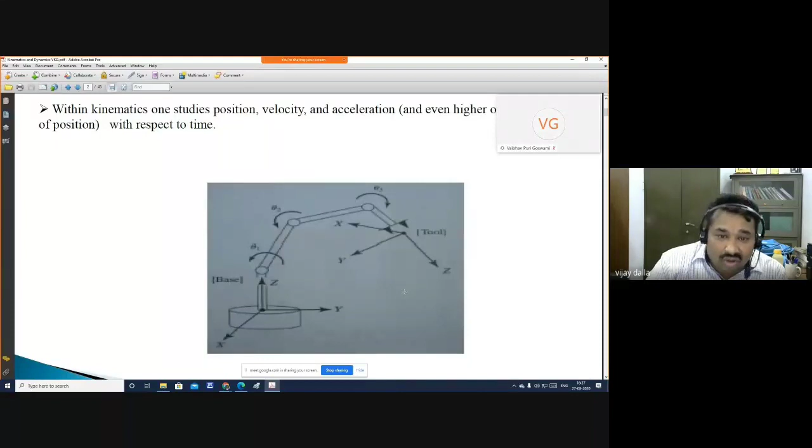So regarding these robot manipulators, the parts of the manipulators, which is also known as the robot anatomy, at each joint we need to put sensors which will tell information of torque, input torque. So just a little bit about the kinematics, then I will go to the dynamics part.

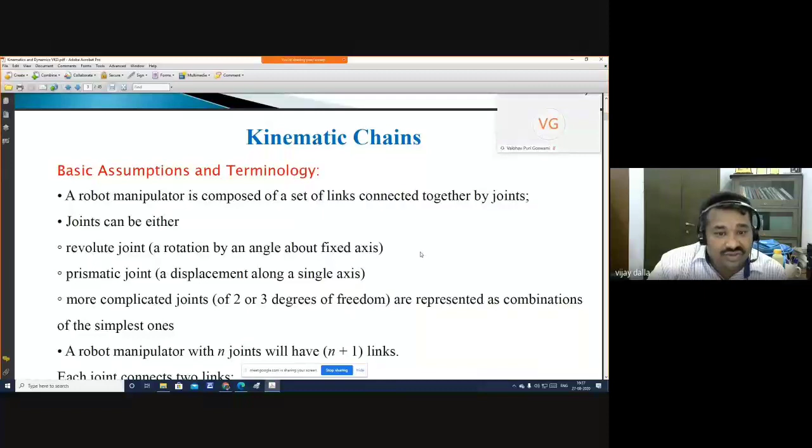So kinematic chains, generally the serial manipulators are used for any kind of operations. Out of the various types of manipulators like parallel manipulators, or you can say humanoid or others, generally serial manipulators are being used. I'm not going to detail more in the kinematics part.

You might be knowing the difference between forward kinematics and inverse kinematics. In forward kinematics, the joint variables will be given as input, and we need to find out the end effector positions. But in the case of inverse kinematics, a set of joint variables like theta 1, theta 2, and so on are what we have to find out, but the Cartesian coordinates x, y, z will be given as input, and we need to find out the joint variables.

In that we will get multiple solutions. Like this is my target point object and I have to reach it, I have to touch it. Suppose I have to deal with this object, so there are a number of ways to reach this point, like this way, or like this way. So this is the beauty of inverse kinematics.

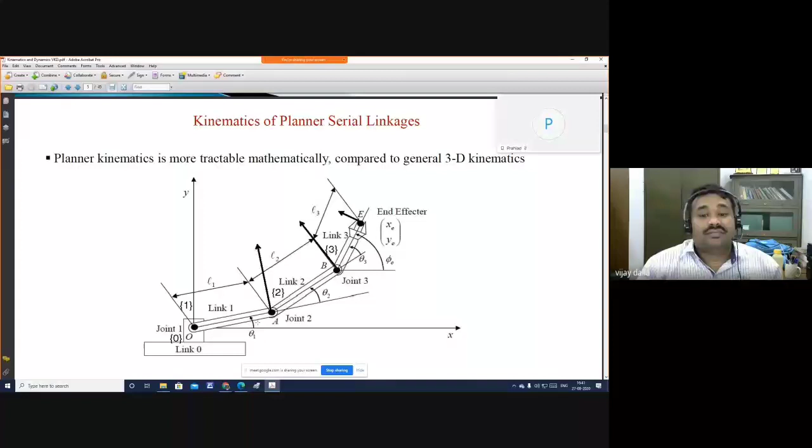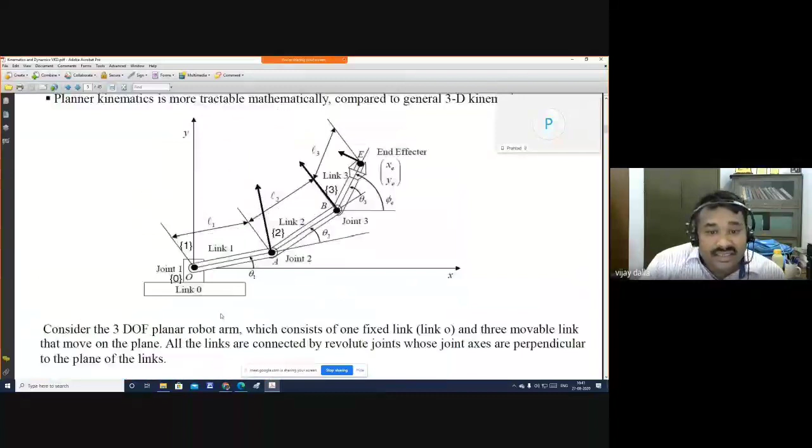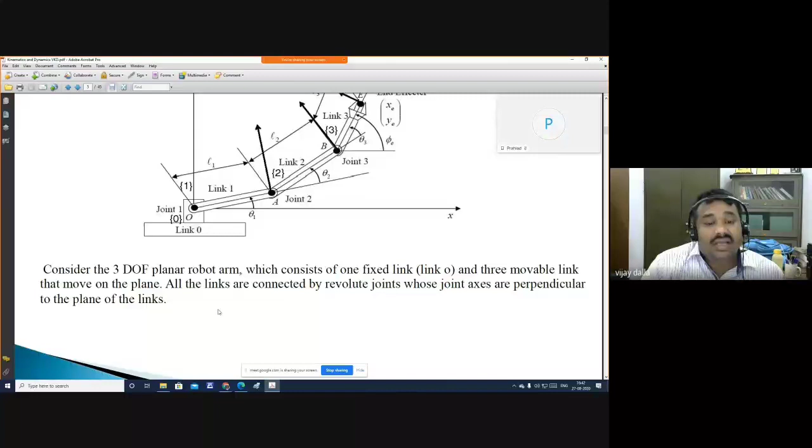And link 0, the base, is the link 0. Regarding degrees of freedom, you might be knowing, but again I'm detailing because the purpose of this course - I have conducted 3 Atal FDPs on robotics and artificial intelligence, 2 on robotics, 1 on artificial intelligence. So the purpose is just creating an environment for learning the basics of thrust areas like robotics, artificial intelligence, 3D printing. So just creating awareness, then a little bit we can discuss research parts, but basics we should know.

Like if you see this equation, YE, the position for Y direction, the end effector position in Y direction. So based on this, please let me know, it's a robot of how many degrees of freedom. You can put your answer in the chat box. Please see this equation and let me know how many degrees of freedom are there, and the condition is all the joints are active.

Passive means the joints are not motorized, not controlled. But active means the joints are controlled. So all the joints are controlled. You can see theta 1, theta 2, theta 3 - there are 3 joints, active joints. So it means 3 degrees of freedom. In robotics, each active joint is considered 1 degree of freedom.

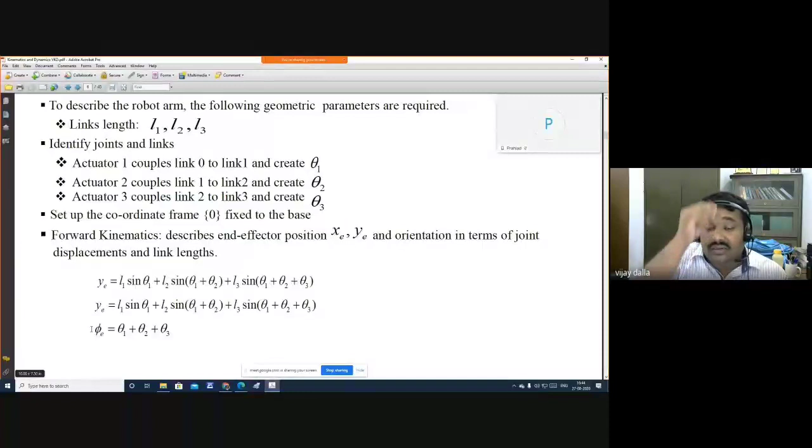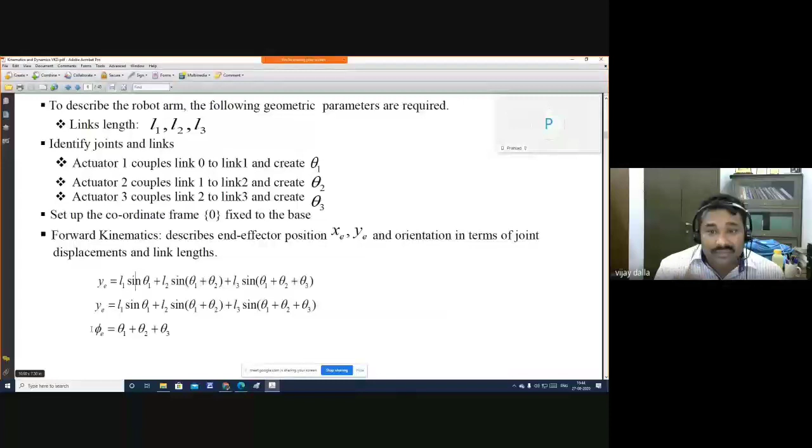Phi E is the configuration, or you can say the orientation of the whole manipulator. What is the difference between manipulator and a robot? Sometimes we say robot, sometimes we say manipulator. A manipulator is a robotic arm, so both are interchangeable words. Sometimes we say manipulator or robot.

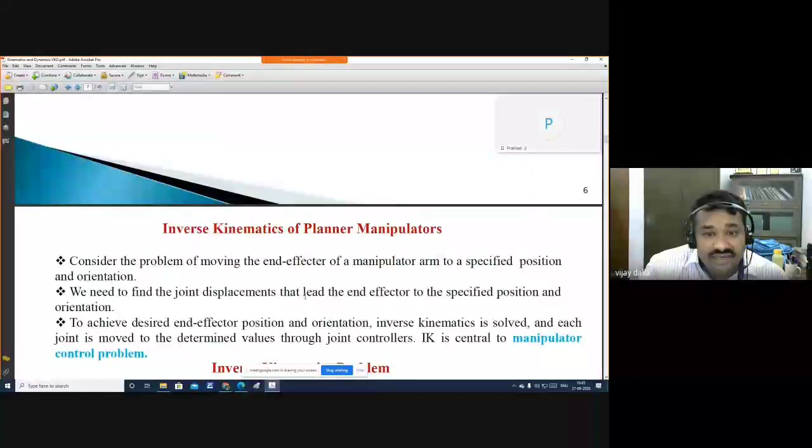I have used one term, configuration. Configuration means position plus orientation, and it is also known as the pose of the manipulator. Pose of the manipulator means position plus orientation. Quickly I am moving because my main purpose is to discuss about robot dynamics.

So elbow up configuration, you can see this one, elbow up, like elbow up, and this is the elbow down configuration.

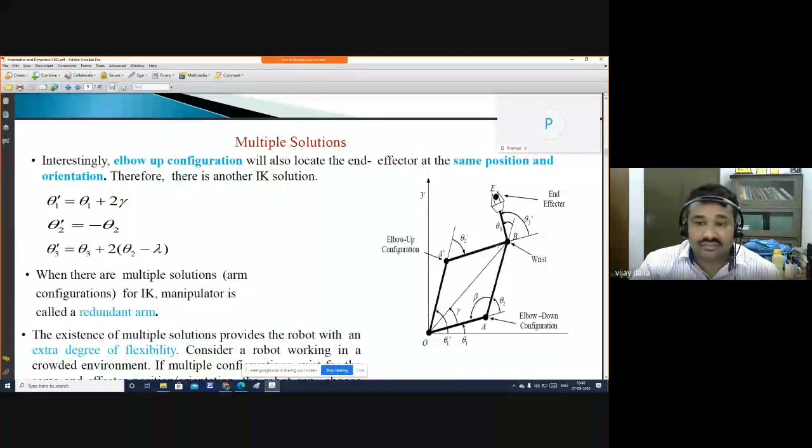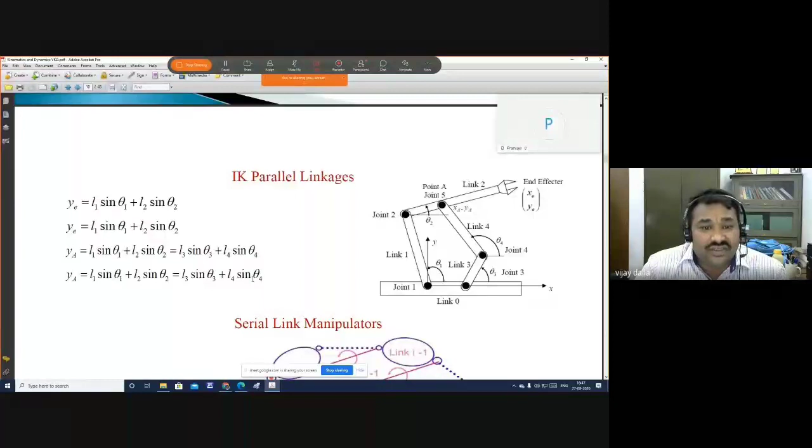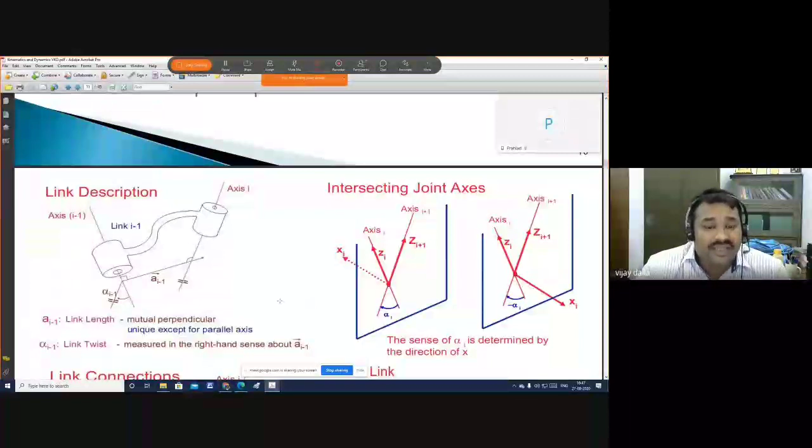You might be knowing DH parameters and why it is required. Geometrically also we can get the robot tip positions this way, but why is DH convention required? This is the question. So the answer is, for the simplest case, for a simple robot, we can use the geometric approach. But suppose a robot has a number of degrees of freedom like 10, 20, and it's in 3D. So we need to opt for the DH convention.

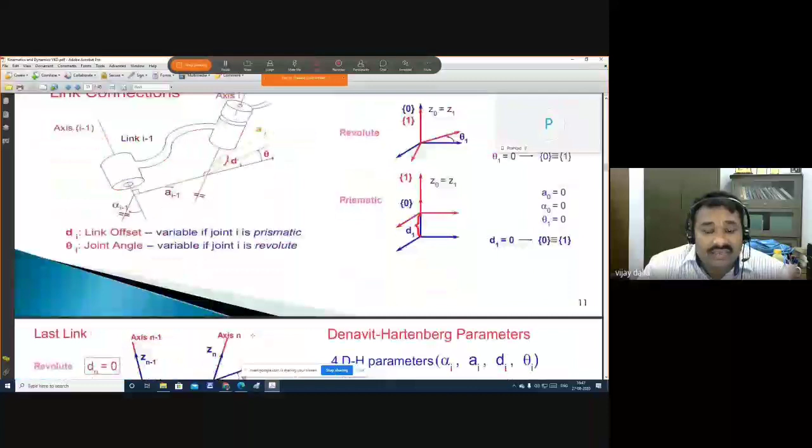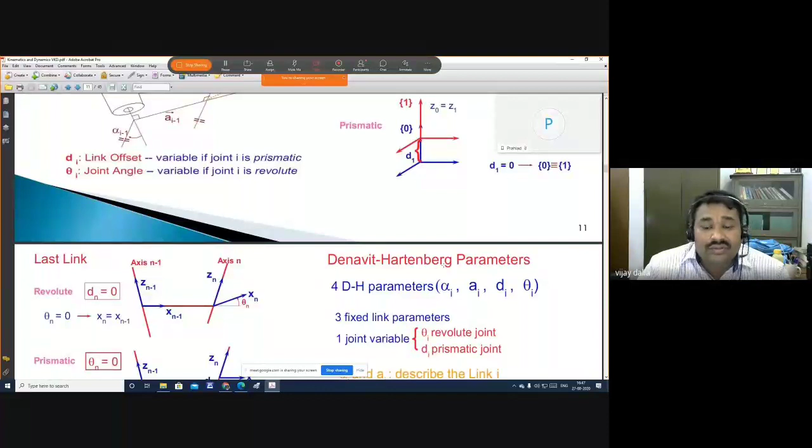What is the full form of DH? The full form of DH is Denavit-Hartenberg parameters, named after two scientists. The main things are there are 4 parameters: alpha, A, D, theta. Alpha is the twist angle, A is the length, D is the joint offset in the case of prismatic, and theta is the joint angle in the case of rotary.

And alpha - if suppose earlier both axes are like this, parallel, as you can say both are coinciding to each other. But what is happening? It becomes like that. So if you want to get the angle, the angle of difference will be here, alpha. If there is no angle, then it will become the previous position, meaning parallel in position - both axes will be in parallel. A means link length.

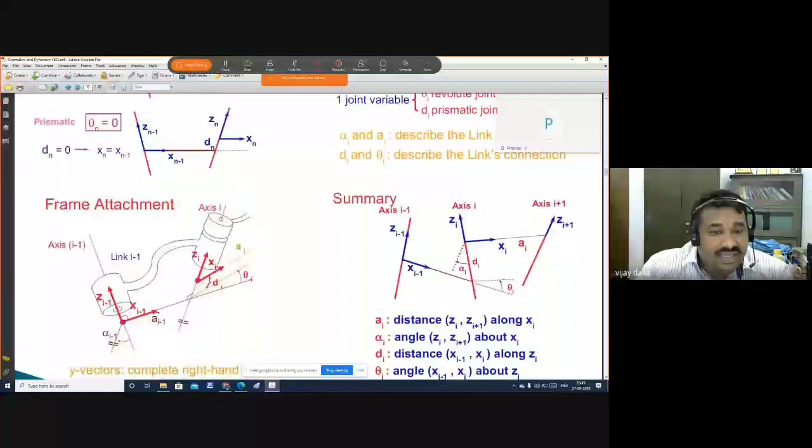So in this way, we can get the derivation of, at the last, the homogeneous transformation matrix. This one is the homogeneous transformation matrix, and here this one - so by putting the values of angles, we will get like this one. Am I right?

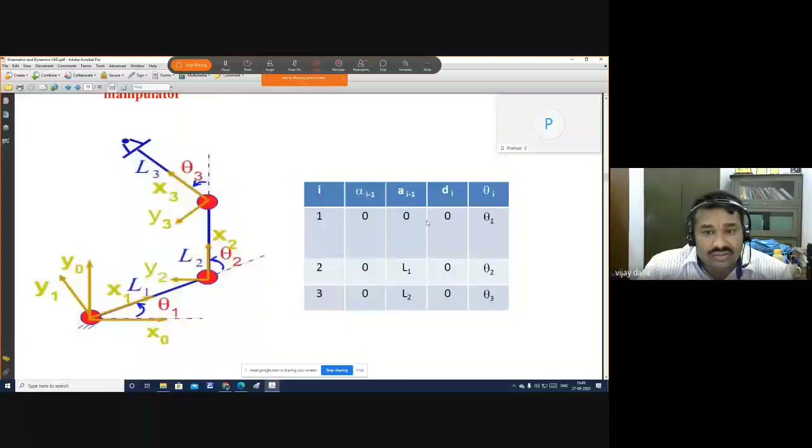No, no, no, these are the parameters. By putting values of these, we will get a matrix. Here it is not shown. So see this matrix, which is known as the homogeneous transformation matrix.

Am I audible now? Yes, sir. Yes, sir, yes, sir, you are audible, sir.

So there is a transformation between I and I minus 1. I minus 1 means the previous axis, and I is the present axis.

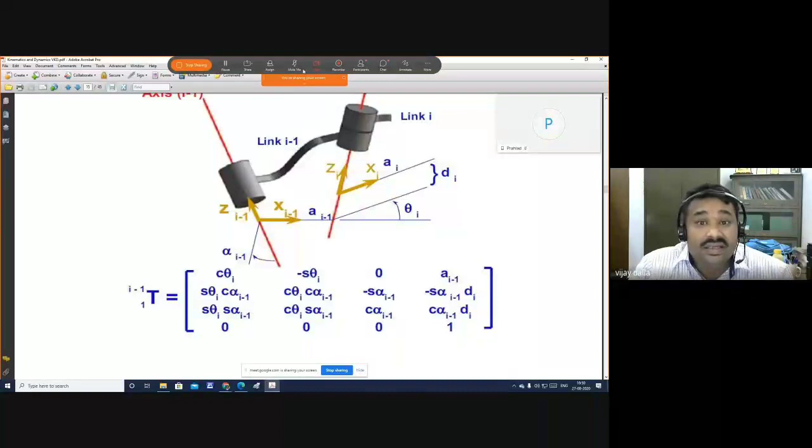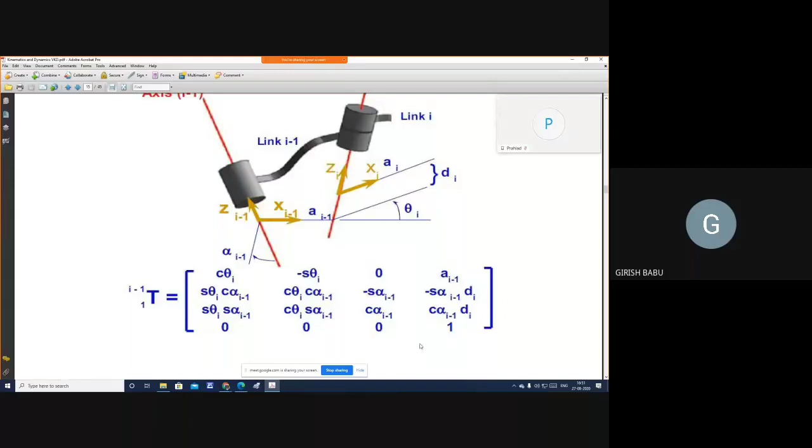Let me know please, is it covered now in the previous lecture, whether it is covered or not. Covered, sir, covered. Covered, na? Okay, yeah.

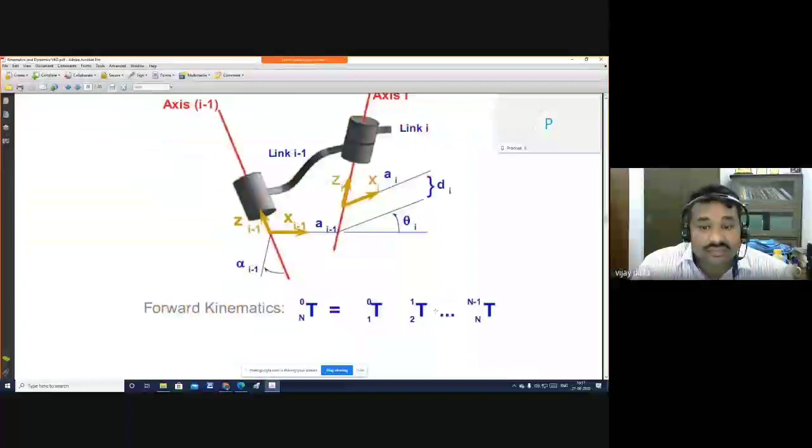Okay, now I'm coming to the dynamics part. So dynamics of manipulator, and again we are going to define kinematics and dynamics. Kinematics deals with the relative relation between position and orientation of the end effector and the joint variable of the manipulator without considering the mass of the links or the forces, torques acting on the manipulator.

In simple language, kinematics deals only with motions, meaning positions, velocities, and accelerations. Dynamics deals with the relation between position, velocity, and acceleration of the robot's joints, along with the force, torque, and moments exerted at each joint to cause the motion. In a manipulator, if each joint is motorized and active, we need an input torque so that joints can be rotated as per the design.

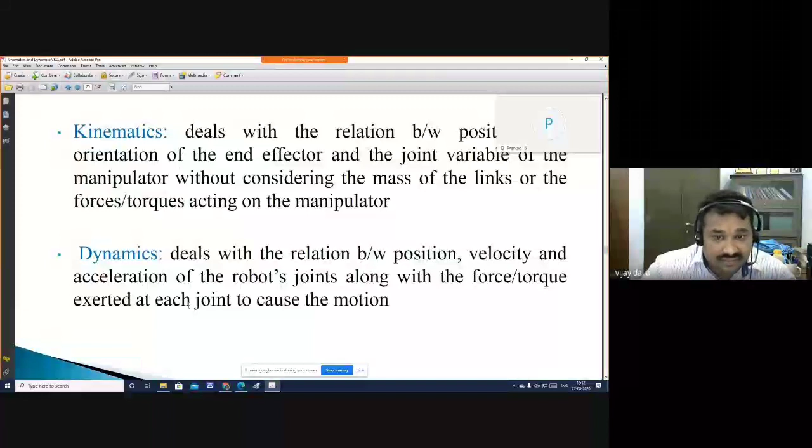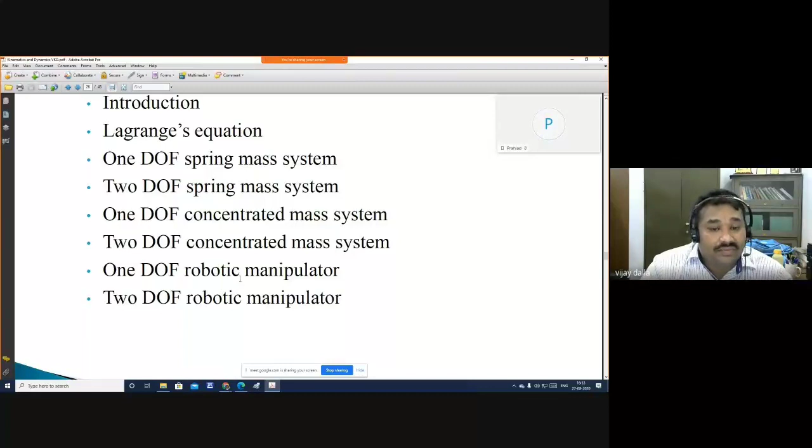So, outline of this dynamics of robot: introduction, and other methods. I will discuss other methods, and 1 degree of freedom spring-mass system, and the same for 2 degrees of freedom, and 1 degree of freedom concentrated mass system. Then I will come to the 1 degree and 2 degrees of freedom robotic manipulator by considering the point mass and concentrated mass system, or distributed mass system.

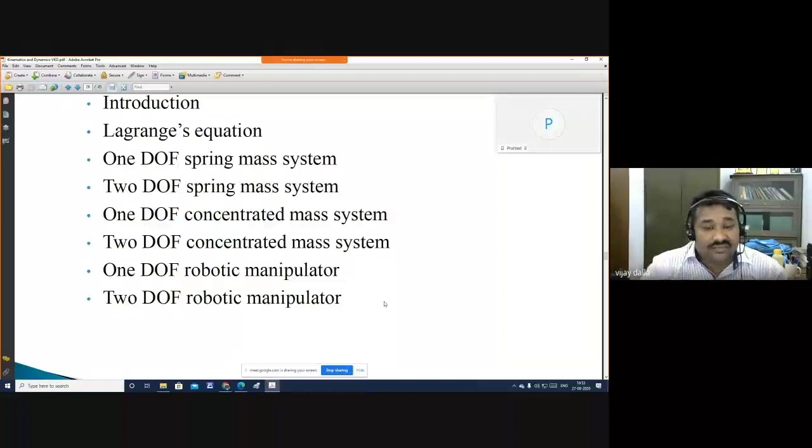You might be knowing when the first industrial robot was made. Nowadays there are a number of applications of robots. It can be used in space, underwater, in nuclear environments, and there are a number of other applications. And why the study of dynamics of manipulator is required,

by considering only the kinematics part, we cannot control a robot. What is the meaning of control here? Control means minimizing the error between the reference velocity and the actual velocity of the robot tip. One thing you should remember, whenever we talk about control, it means the end effector. Whenever we talk about controlling the motion of the manipulator, our main concentration is the end effector of the manipulator. So controlling means minimizing the error between the reference velocity and the actual velocity.

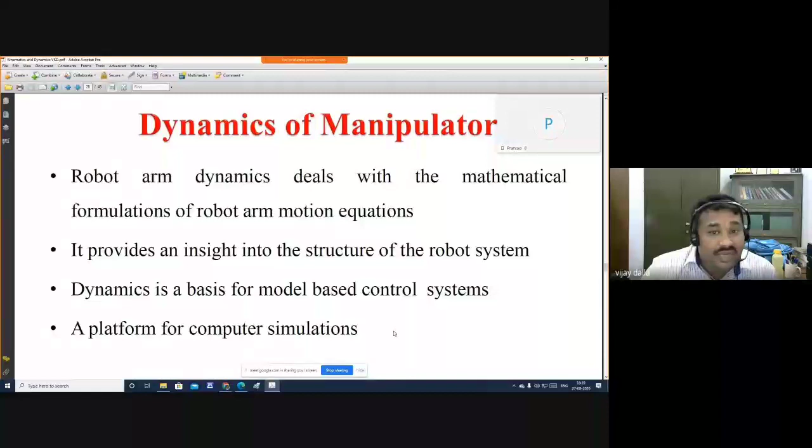That's why we need to consider this. Without considering the weight, without considering the mass, without considering the force required to get a desired motion, we cannot get the desired task completed. And for simulation also, if you only consider kinematics, the behavior will be different. If we add the dynamics part, the behavior will be different, and that will be the actual behavior.

Okay, just one minute.

Okay, now what are the different approaches to analyze the system's dynamics? So basically we know about two approaches, and the third one, bond graph technique, is also there, but it is not studied, so we will focus only on the two approaches. Bond graph technique is what I have used for my research work, so by using this also we can analyze the system.

So first one, Newton-Euler approach. You might be knowing it's not a new thing, but how to apply this in the case of a manipulator. Newton-Euler approach is based on force moment balancing, and the Lagrange-Euler approach is based on energy.

And the bond graph technique is a graphical representation of a system, and for this, as input, kinematic equations are required, and with the help of graphical representation, the dynamic equations are automatically derived. The software we can use is called Symbols, and it's freely available.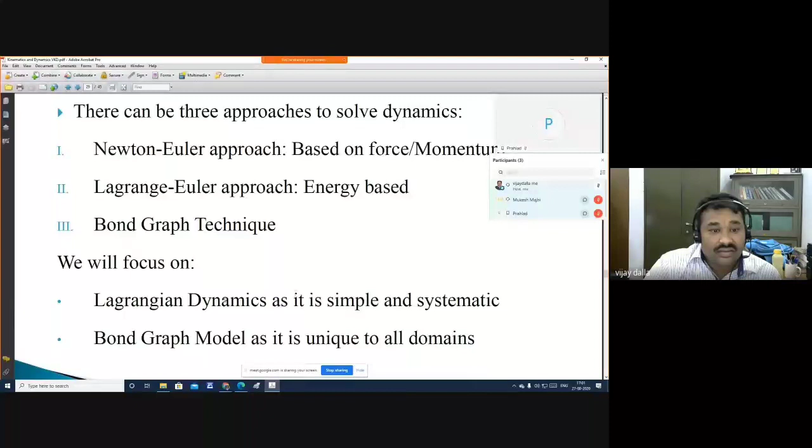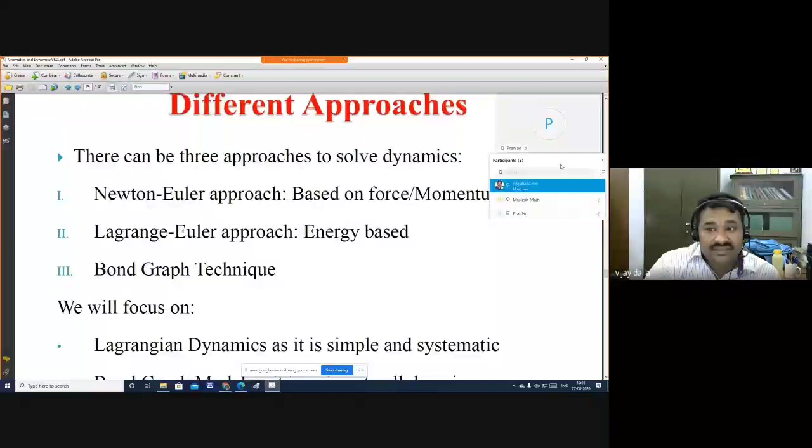So we are going to focus on Lagrangian dynamics, mainly Lagrangian dynamics. Now, which one is the best one? For the simple system, you can use Newton-Euler approach. For the complex system, the Lagrange-Euler approach is the best one.

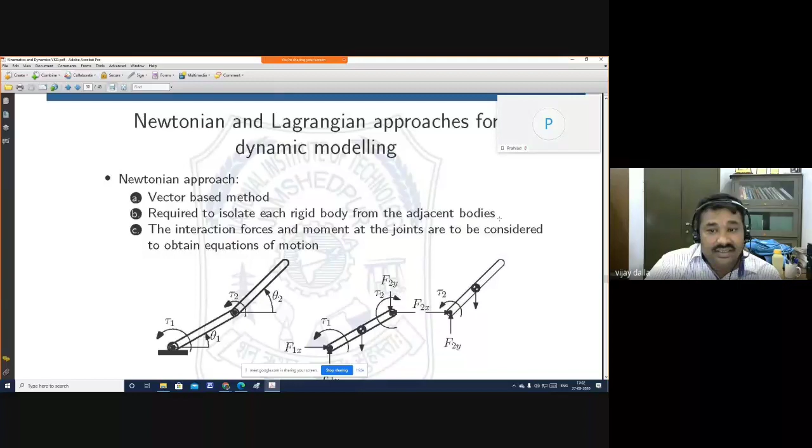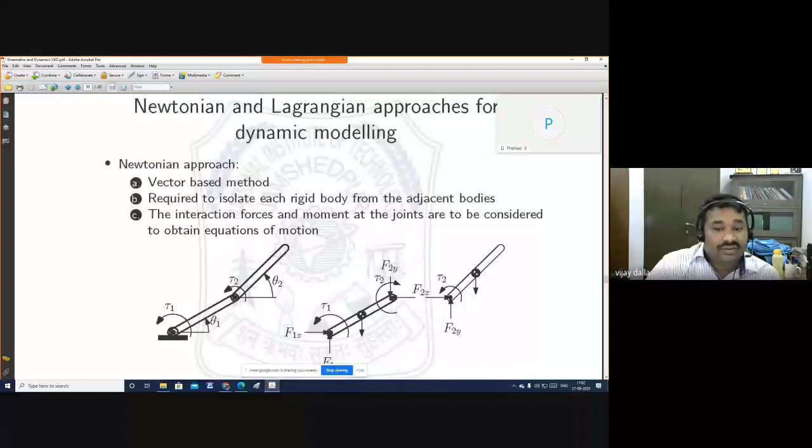Now, regarding the Newtonian approach, it is a vector-based method, and for this it is required to isolate each rigid body from the adjacent bodies, like these rigid bodies, link 1, link 2. The robot links may also be flexible, but here we have considered them rigid, so it can be isolated this way, meaning a free body diagram. We can make a free body diagram.

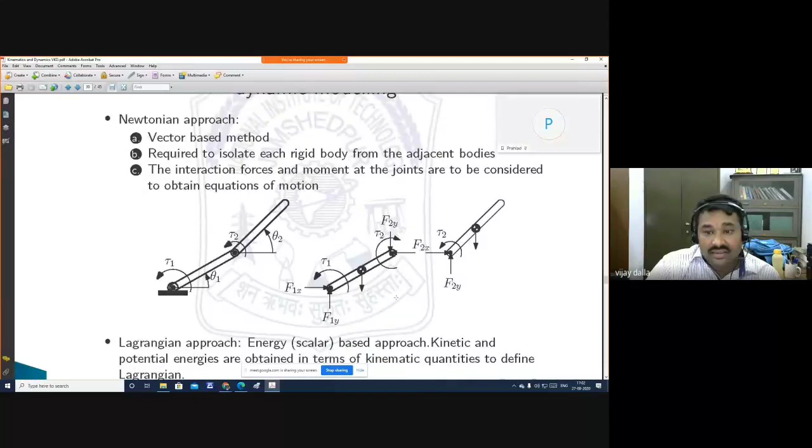You can see this one, link 1 and link 2, both got separated, and the reaction forces in the x direction and the y direction we have written here, and tau 1 is applying at joint 1, theta 1. This is the gravity, and this is the center of mass of the robot link. Now by separating this joint, you can see this joint is anti-clockwise, so if you separate link 1, the reaction will be clockwise, and the force vectors F2y in Y direction, F2x in X direction. In this way we can make a free body diagram.

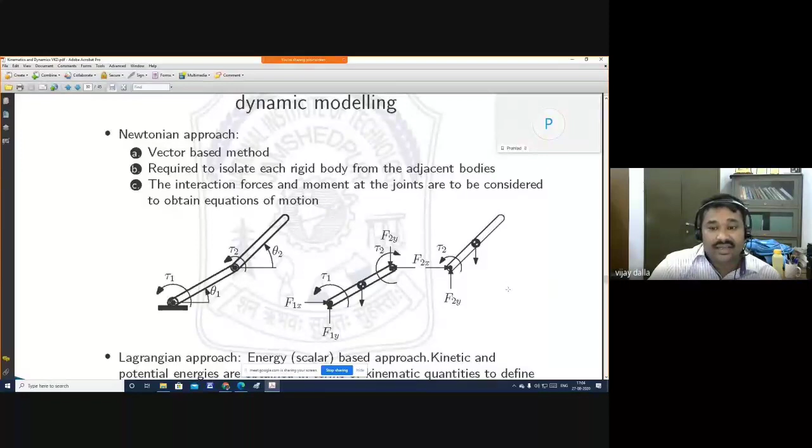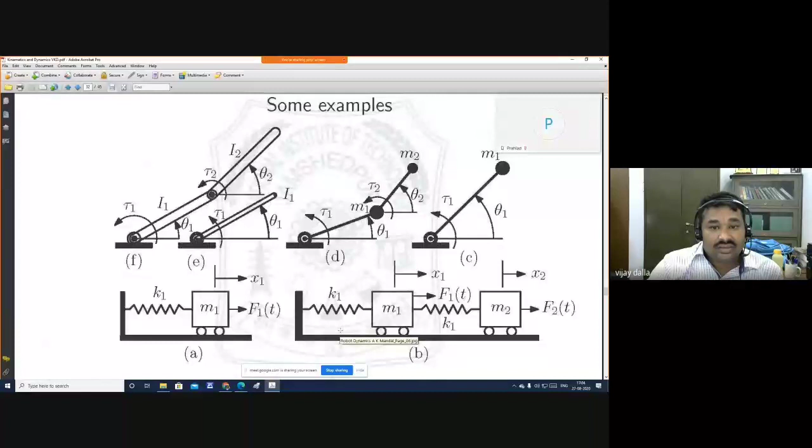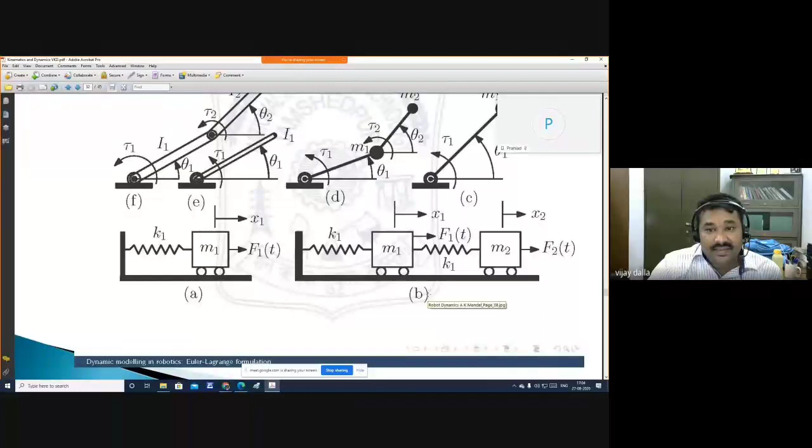Now, these are some examples. We will start from the spring mass system. It is a cart system. See, there is only mass 1, and in this case, figure B, there are 2 masses.

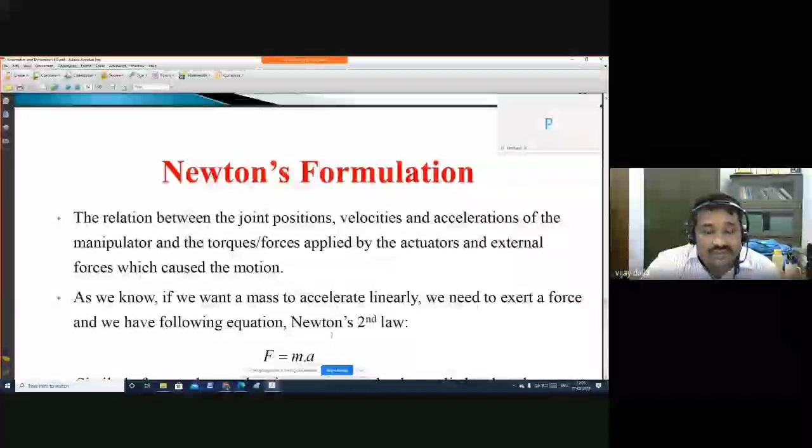Equation of motion for single degree of freedom spring mass system. This is based on the Lagrangian approach, so we should know about that. Before that, I want to discuss Newton's formulation. As I told you, this is a force balance equation, and it is based on Newton's second law, and the equation you all are aware of, F is equal to ma.

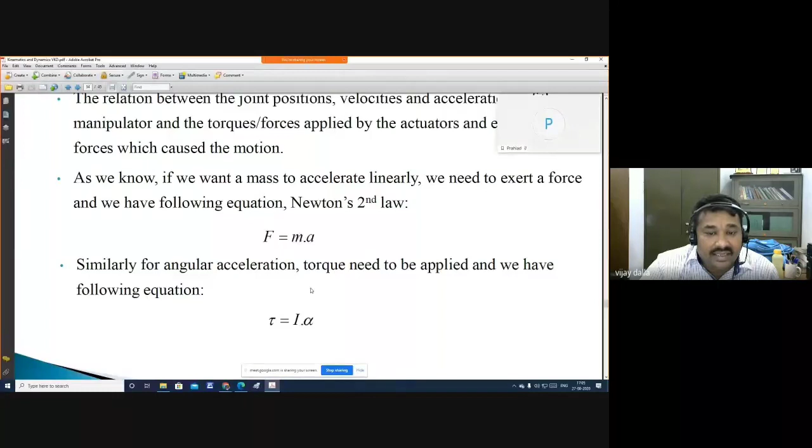This is in the case of linear acceleration, and in the case of angular acceleration, F becomes tau, M becomes I here, and A becomes alpha here. So regarding the Lagrangian formulation,

L is equal to K minus P, Lagrangian, it is known as the Lagrangian operator, or simply Lagrangian. It is defined as L equals K minus P, where K denotes the kinetic energy of the system, and P denotes the potential energy of the system.

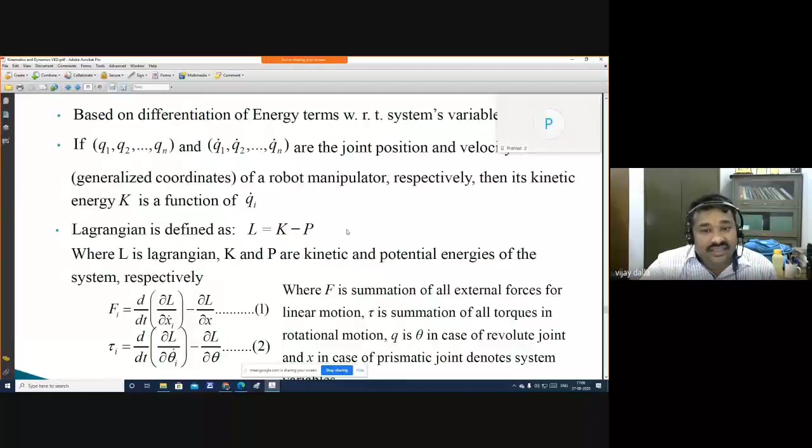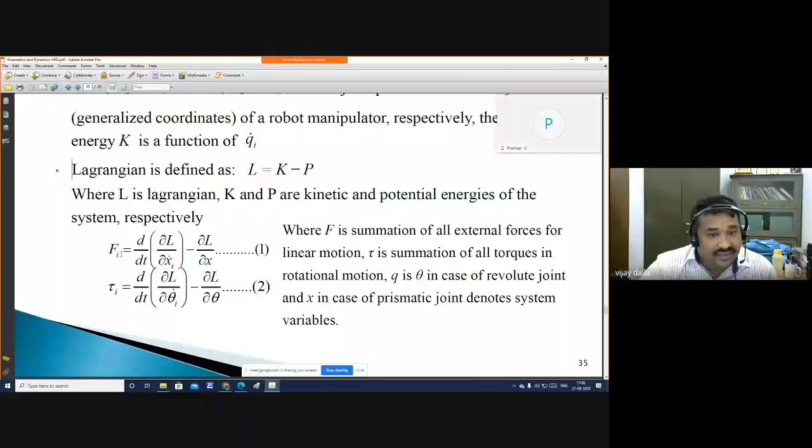Okay, and how to formulate any force equation or torque equation, or simply you can say dynamic equations. So see this one, Fi, and i denotes the number of joints.

So see this one, it has 2 parts, there are 2 terms, you can say the left and the right. The right one is the partial differentiation of this L with respect to the position x, and again the time differentiation of this partial differentiation of L but with respect to velocity, not position. In this, again in the left side and the right side, this is the differentiation with respect to x, and x is the position.

But here in the first term, the partial differentiation of L, Lagrangian, is with respect to the velocity, linear velocity, and again we need to differentiate with respect to time of this partial differentiation. Similarly, in the case of rotational motion, F becomes tau here, L will remain the same, but x dot will obviously be theta dot, the angular velocity, and x is the linear position, so here it becomes the angular position.

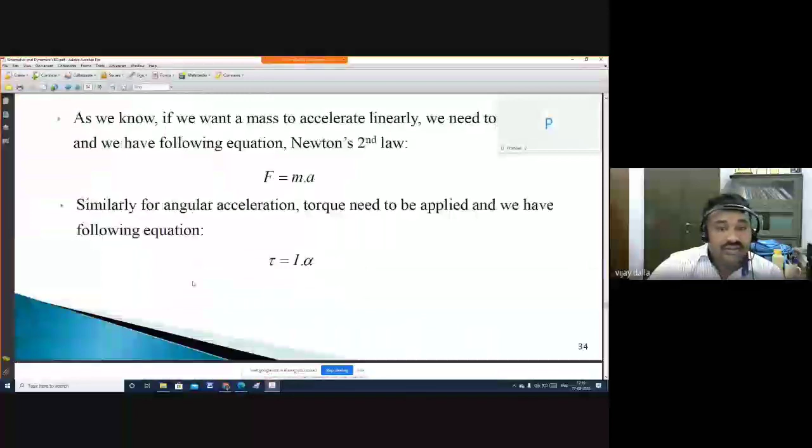Now coming back. This one is a spring mass system with 1 degree of freedom. Why? Because here there is only a single mass M1. The notation here is different, I have taken it from one of my colleagues, Dr. A.K. Mandal, so the notation is different here, but the theme of the equation is the same.

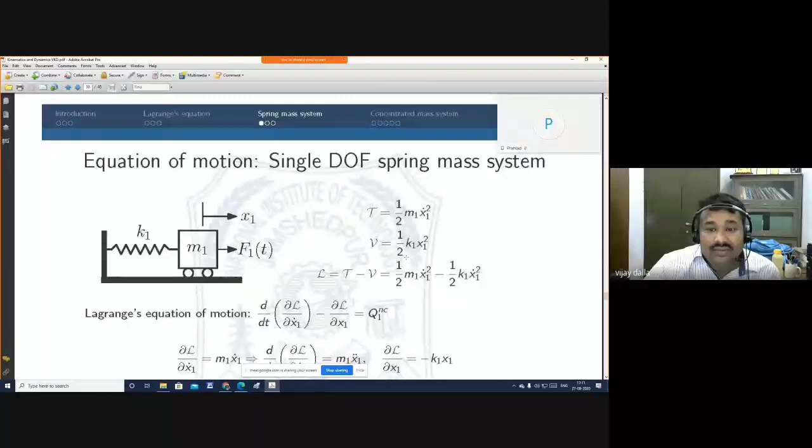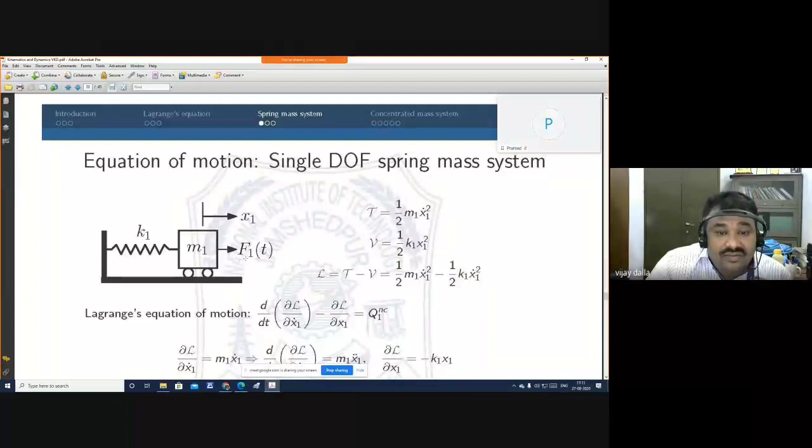Here kinetic energy I have written as K, so here also I am taking the same. K is equal to 1 by 2 M1 x1 dot square, kinetic energy, you are all aware. And this one, the potential energy, I have described as P, so 1 by 2 K1 X square, X1 square. K1 is the spring constant, spring stiffness, and X1 is the variable showing the direction of motion. F1 is the force applied to this spring mass system, you can say the externally applied force.

So with the help of this kinetic energy and potential energy, we have to put here the Lagrange equation, kinetic energy minus the potential energy, then we will get this one. Now we have to apply the Lagrange equation. So this is the equation, and see this one, suppose this part we have taken here, this part.

L means partial differentiation of L with respect to x dot, means velocity. So what will this one become? It becomes M1 x1 dot. Now again we have to differentiate with respect to time, so x dot now becomes the double dot, meaning velocity becomes acceleration. And in this, because it's a linear motion, there is no theta, that's why we need to apply here the force equation, this one is the force equation.

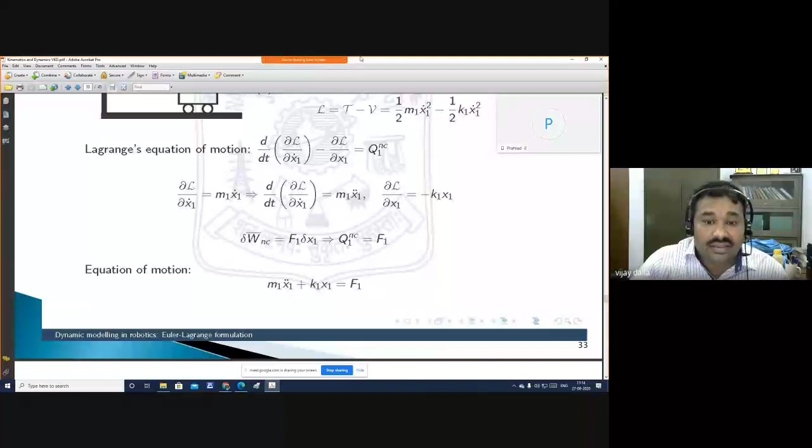Sir, what do you mean by x1 double dot? X1 double dot means acceleration. Yes. Okay, thank you sir.

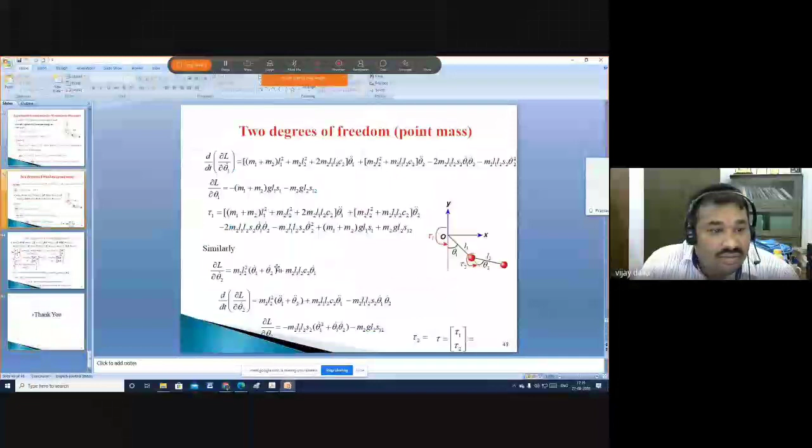Okay, so shall I continue? Yes sir, yes sir, you can continue. Okay, okay. Yeah just 1 minute. Yeah, is it visible sir? Yes sir, yes sir, it's visible sir.

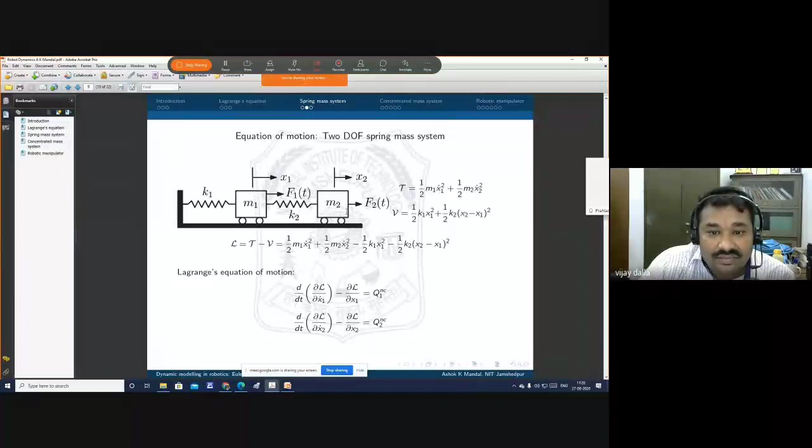Equation of motion, 2 degrees of freedom, spring mass system, is it visible now? Yes sir, everything is visible sir. Okay, so here is 2 degrees of freedom based on these masses m1, m2, that's why it is having 2 degrees of freedom. And see the forces acting on mass 1, that is F1, time dependent T, and at M2, F2, T variable, meaning a function of T.

So the same kinetic and potential equations you can write here for mass 1 and mass 2, the kinetic energy. And for the potential energy, similarly you can take 1 by 2 k1 x1 square plus 1 by 2 k2 times the difference, x2 minus x1, squared - you have to put square there. Then we need to apply the same Lagrangian equation, and it is the linear velocity, so no need to apply the torque equation. By applying only the linear equation, we can get the dynamic equations, so nothing else is here.

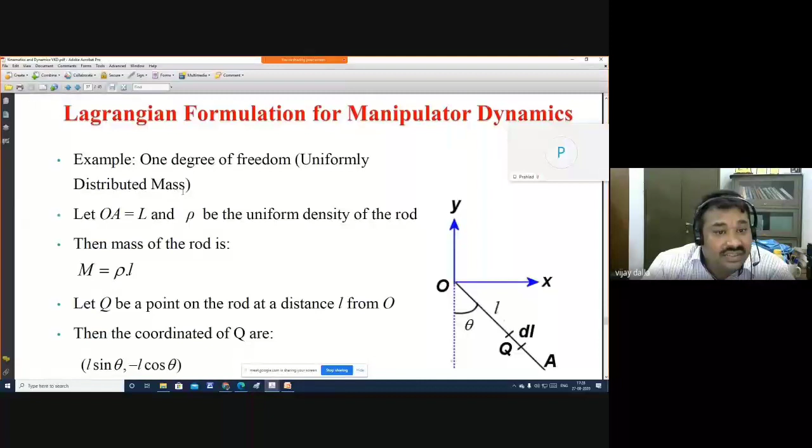Now, the Lagrangian formulation for manipulator dynamics in the case of uniformly distributed mass. Now, the link mass also we are going to consider, that uniformly distributed mass.

So see, the same x, y is the coordinate system. Coordinate system means it is the reference frame, or you can say the fixed coordinate system, or also you can say it is stationary coordinate system. It is not moving.

Now this one is the link. The length is this, from here to O to A. Length is capital L. But what about, suppose this is a small element that we are going to consider. So from this O to this, up to this, is small l, and this link is oriented by theta angle. So it is in which coordinates?

Let OA be capital L and rho be the uniform density of the rod. So what about the mass of the rod? M will be rho L.

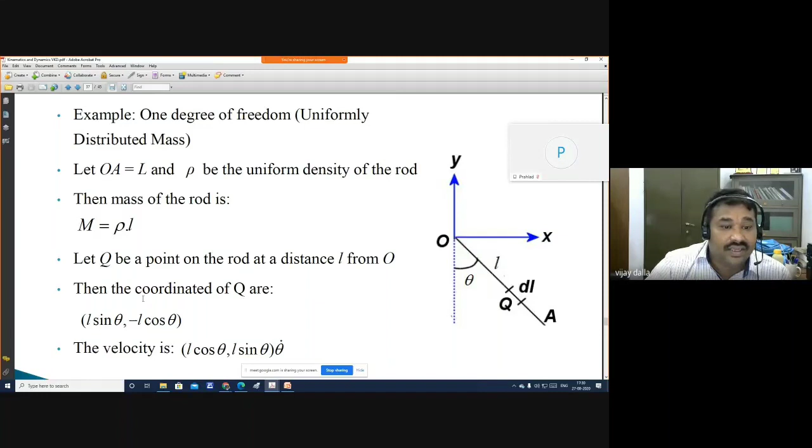Let Q be a point on the rod at a distance l from O. Suppose this is our target point, the point we are going to consider. Then we need the coordinates of Q.

What about the x coordinate? x is cos of 90 minus theta, which becomes sin theta, so l sin theta. Now for the height, it's in the minus y direction, that's why we have taken minus l cos theta.

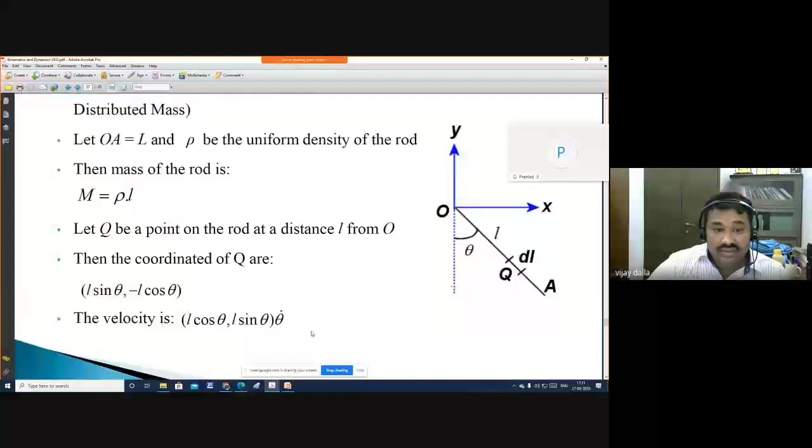Now the velocity will be this one. As I told you, we need to differentiate these coordinates with respect to time, so theta dot will be common for both coordinates. We have to find the coordinates for x and for y, because ultimately we want to know the velocity.

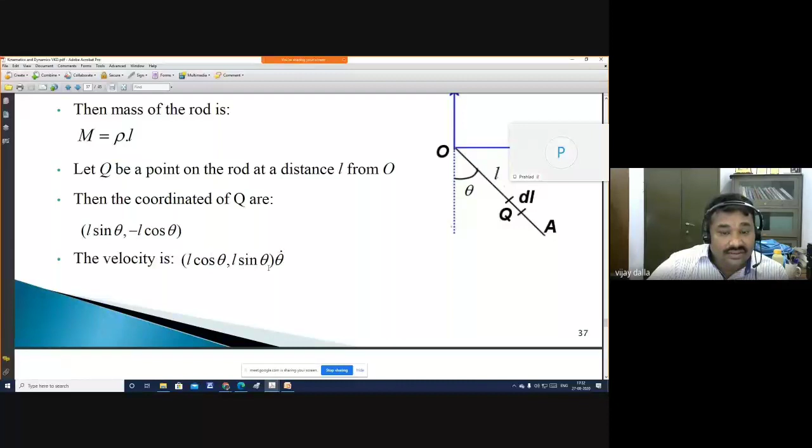This is v squared. Like earlier, it will be L squared theta dot squared. We get this by squaring both terms, adding them, and taking the square root, then we get this result.

Now let dl be a small element, then the kinetic energy of the element dk is equal to 1 by 2 rho dl, meaning m. This m is rho L, that's why we have written rho and, instead of L, dl, because we are considering the small element.

So m and v, mv squared. So this is m into L squared theta dot squared, in place of v squared.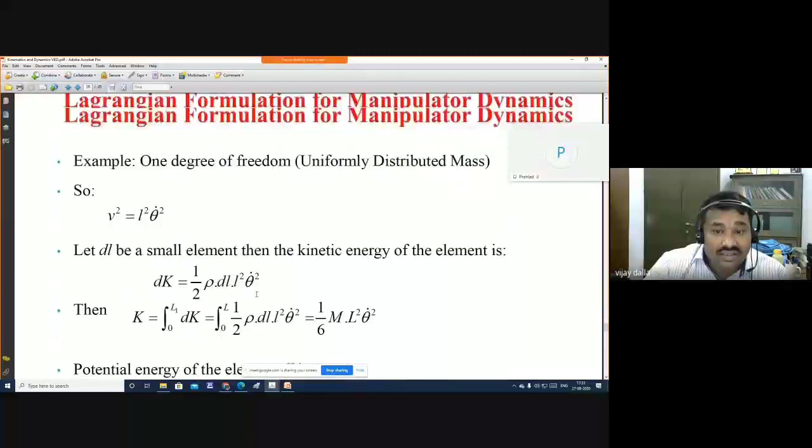Now how to get the capital K, the kinetic energy for the full link length? By integrating and putting the limits 0 to L. L1 is not required here because there is only one link, so it's 0 to L1, that's why I have written 0 to L.

By putting the expression of dk here, we get this result. Okay, I am in doubt about this one, I am not very clear about this.

How to get the potential energy of the element dl, if you know this term, I'm not getting how to get this, but you can try in your own way, and if you understand it, that's okay. In this way we can get the potential energy, but how to get this exactly, I am in confusion, so I'm not going to detail how to get this. But we got the kinetic energy, and with the help of this we will get the potential energy.

So ultimately we have to get capital L, then we put all these expressions in the dynamic equations and we will get the final equation, the equation of dynamics or torque equation. This is more practical for many real life manipulators, since the mass is uniformly distributed, so one can rely on this second example for more practical purposes.

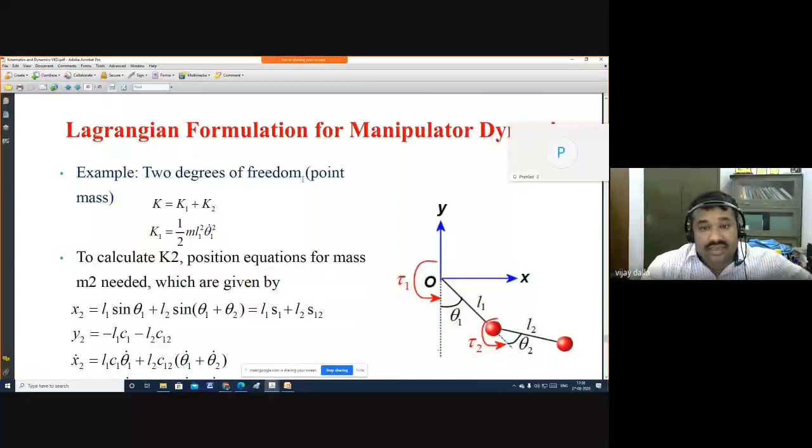Now we're going to discuss 2 degrees of freedom, but we are taking the point mass again, the mass concentrated at the end of each link. So for link 1, it is concentrated at the end of link 1, and similarly for link 2. Then how to get the kinetic energy and the potential energy?

It is also not very difficult. What you have to do: K, the kinetic energy, is K1 plus K2, and K1 will be this one, M V squared. V squared we have already computed, and now to calculate K2, the kinetic energy for link 2.

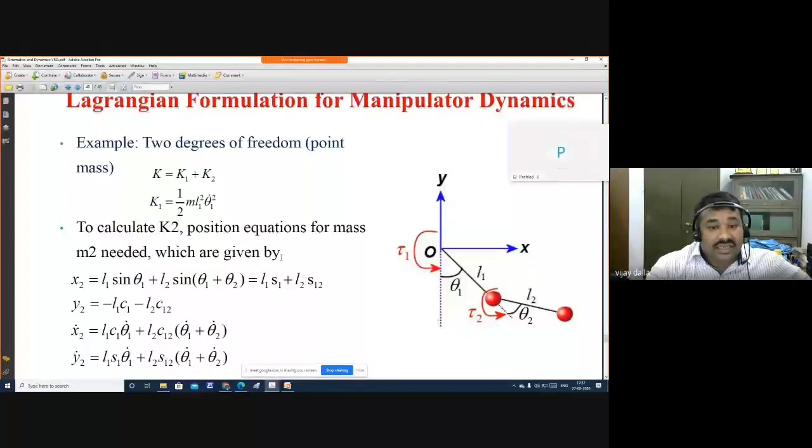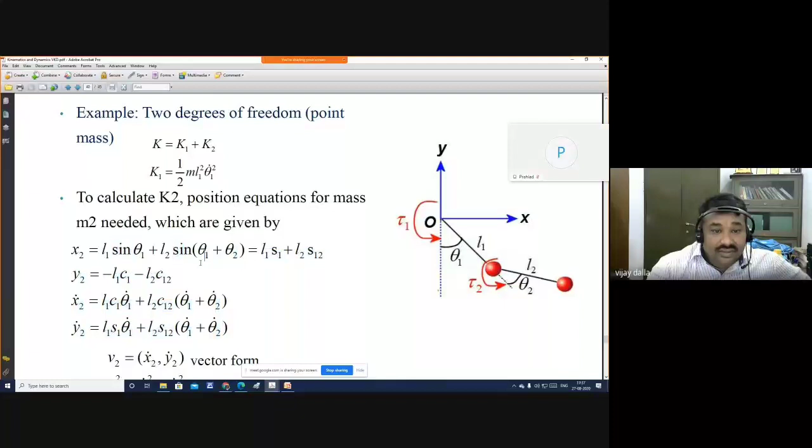Position equations for mass M2 are given by X2 and Y2. How to get X2? L1 sin theta 1 plus L2 sin of theta 1 plus theta 2. Similarly we can get Y2, and here S12 denotes sin of theta 1 plus theta 2.

Similarly we can get Y2, and by differentiating with respect to time we get the velocity in the X direction and Y direction for link 2. In vector form we get v2 squared equals x2 dot squared plus y2 dot squared.

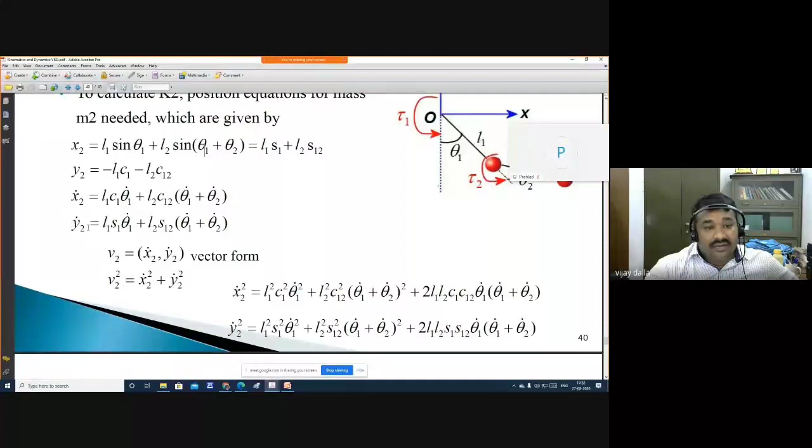Okay, then what do we have to do? This x dot square, x2 dot square, we have to square it. Similarly, y2 square also, so that we can get v2 square.

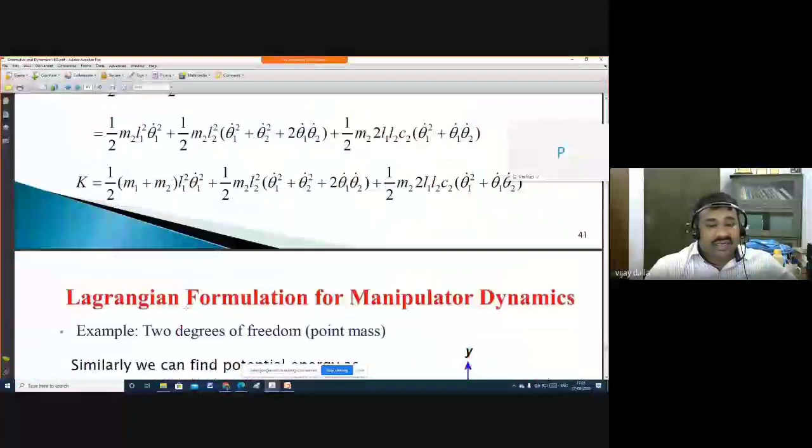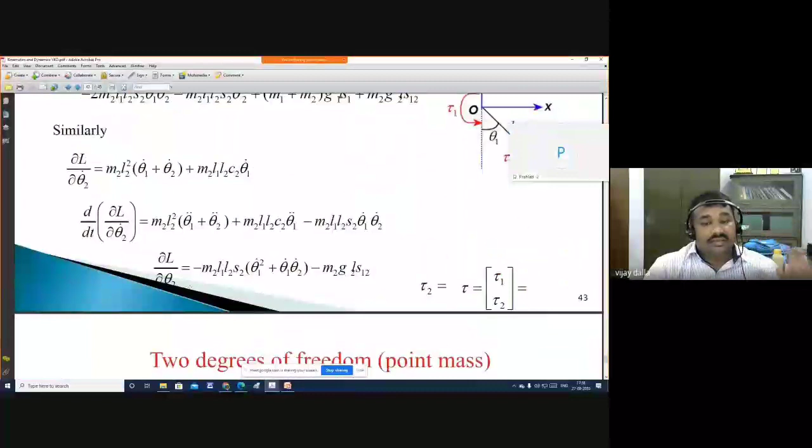Okay, so ultimately it's nothing difficult. Ultimately we will get the final dynamic equations. But here we will get two torque equations: torque 1 for joint 1, at joint 1, and torque 2 for joint 2.

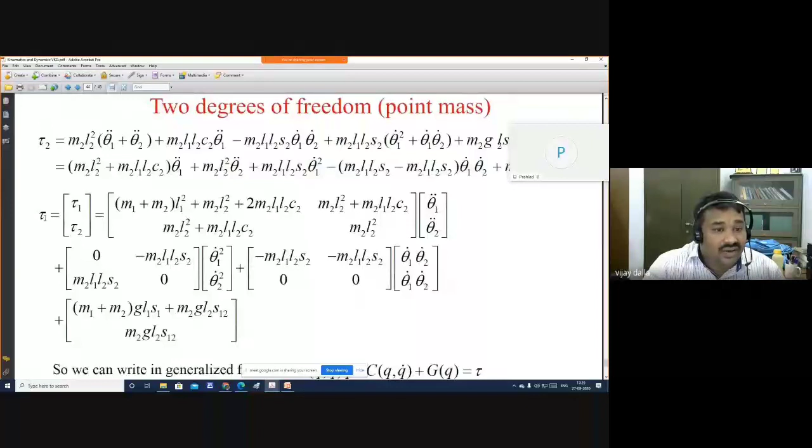So that's why it can be written this way, tau 1 for joint 1, applied at joint 1, and tau 2 applied at joint 2. This can be written in matrix form: tau is equal to tau 1, tau 2 in matrix form.

Okay, then we will get this one. How many steps here? One, two, three, and the fourth one. And this we can write in generalized form as M, Q dot, then Q double dot. This M is a function of Q, the generalized coordinates for position and velocities, plus

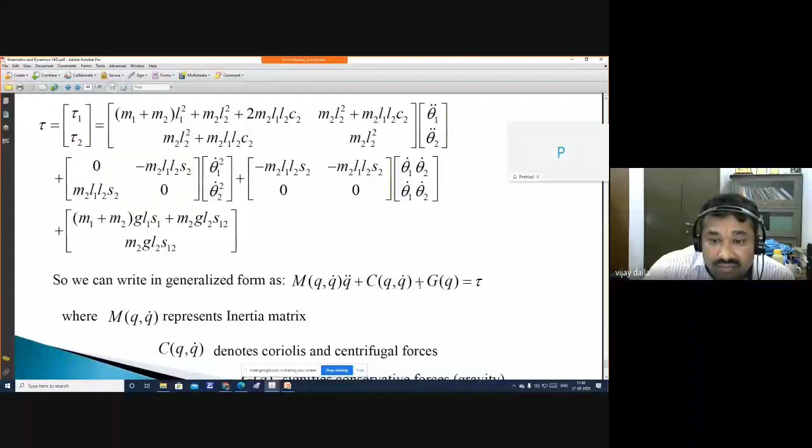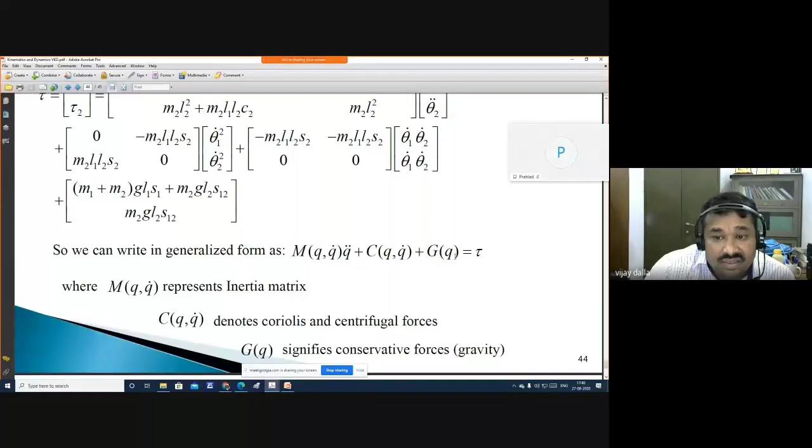C, it is a function of Q and Q dot, same like M, but there is nothing here with Q dot, Q double dot, and the last term plus G of Q. G, gravity, is also a function of Q. Okay, and what about this one?

This first term represents the inertia matrix. This second term denotes the Coriolis and centrifugal forces. And the last one signifies the conservative force, or you can say gravity.